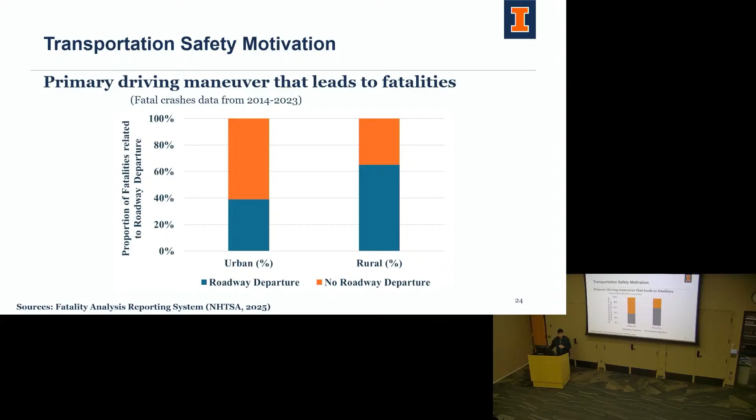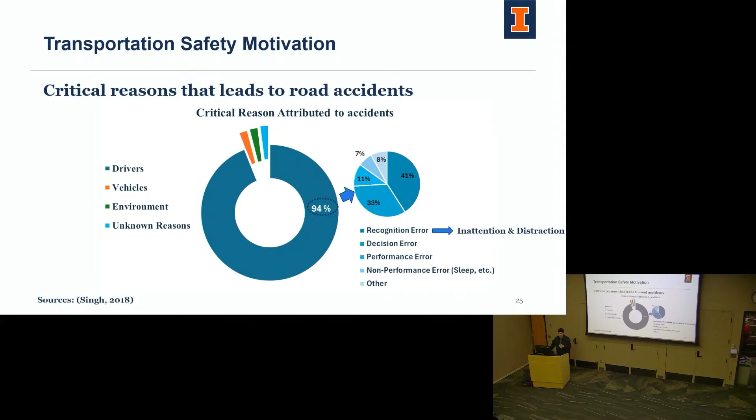The primary driving maneuver that leads to fatalities in the US, nearly 50%, is roadway departure. And the critical area is the rural roads, where more than 60% of roadway departures occur. And the critical reason that leads to road accidents, I think everyone in this room might know it: it is human mistakes. More than 90% of road accidents are caused by human error. These errors include recognition errors, such as inattentive driving and distraction, and decision errors, such as speeding or driving too fast for the conditions.

Recently, in the last decade, we have a promising technology called advanced driver assistance systems. This system can address human limitations and has improved roadway fatalities for the last decade. However, when the road marking is covered with snow or the lane marking is obstructed, these systems are not reliable since they heavily rely on visual sensors. So I'm trying to create an electromagnetic-based communicable roadway that can convey crucial safety information or instructions to the driver, overcoming weather limitations and minimizing driving mistakes caused by human error.

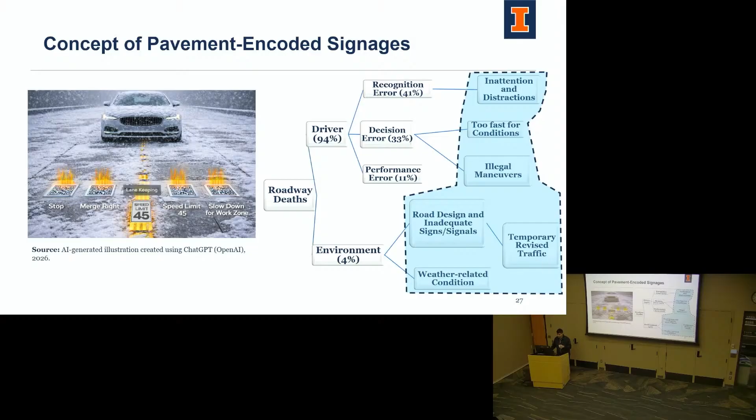So this is the new idea. The initial idea was in 2002 at California, Berkeley. They put permanent magnets on the roadway to assist bus lateral guidance and precision docking at the bus station to reduce the workload of the driver. Later, one of the PhD students in my research group found that we don't necessarily need to embed an actual permanent magnet. We can also disturb the local Earth electromagnetic field by embedding high magnetic permeability material in a pavement layer. He put in materials such as steel fiber, iron filings, and metglas ribbon, and this disturbs the local Earth magnetic field, and the sensor can detect the lateral position from this material.

However, after that, we received feedback asking about temporarily revised traffic areas such as work zones, because we need to change the electromagnetic signature in that area. So right now I'm focused more on temporary deployment. I think the answer is a coating application. I was trying to put magnetizable material and coat it on the roadway.

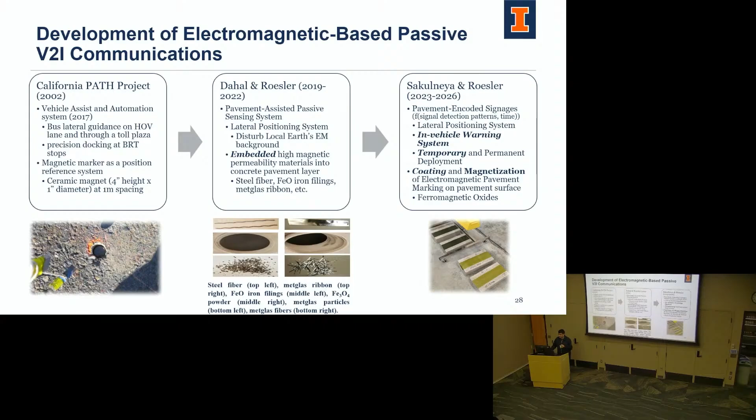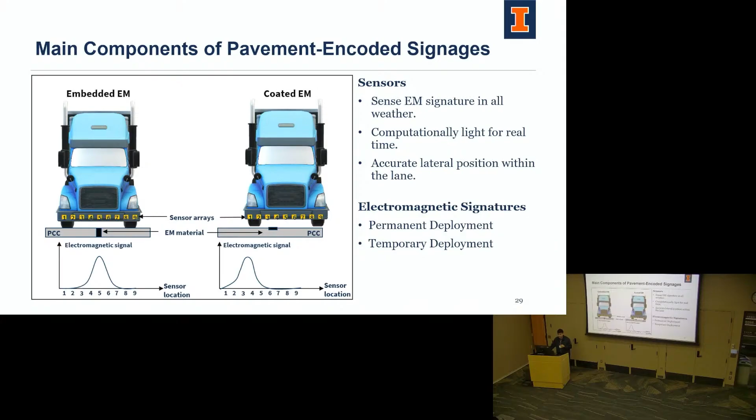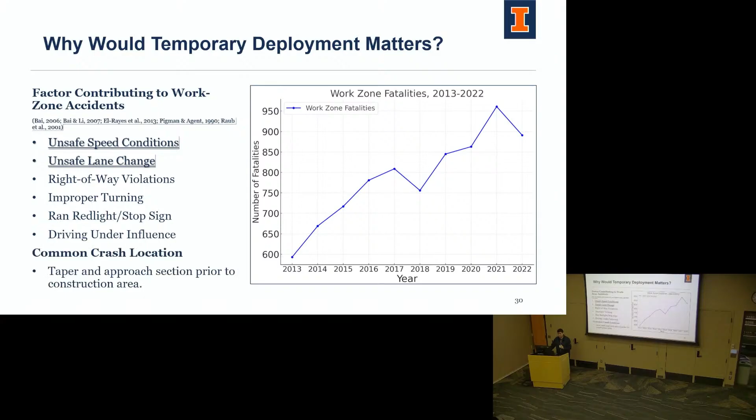So why would temporary deployment matter? According to work zone fatality statistics for the last decade, the fatality trend in this area continues climbing up. The two major factors contributing to these accidents are unsafe speed and unsafe lane changes, which occur mostly in the taper and approach sections prior to the construction area. The main reasons are driver error, distraction, and inattention. Several countermeasures have been implemented in this area, but according to the statistics, the trend never went down for the last decade.

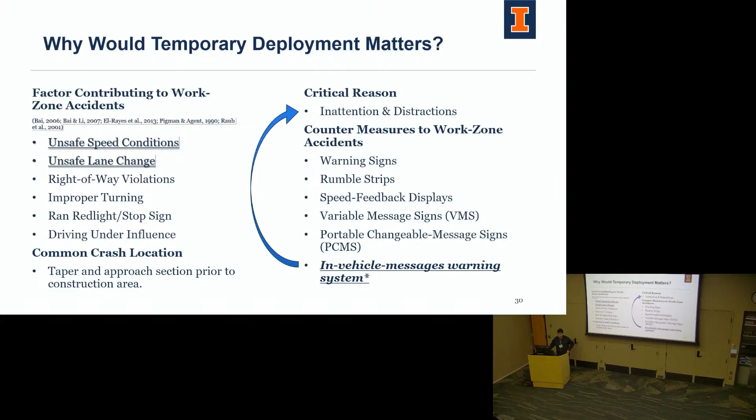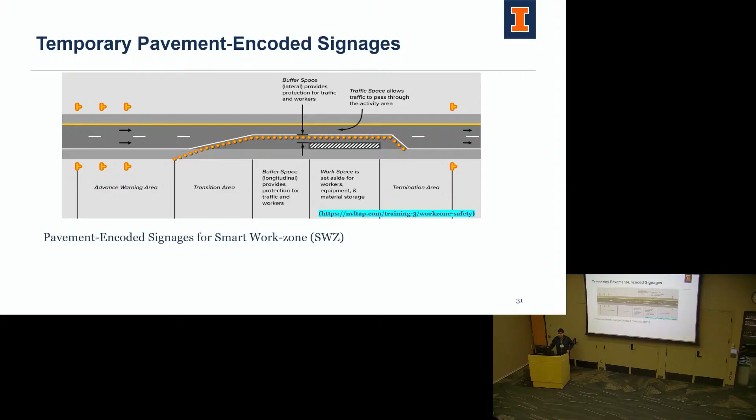So we're trying to build a smart work zone warning system to address driver inattentiveness, unsafe speed conditions and unsafe merging conditions. Imagine if I place the pavement encoded signage for the speed warning for the vehicle approaching the advance warning area, and then I put the pavement encoded signage for the merge left, for the lane merge warning, in several patterns.

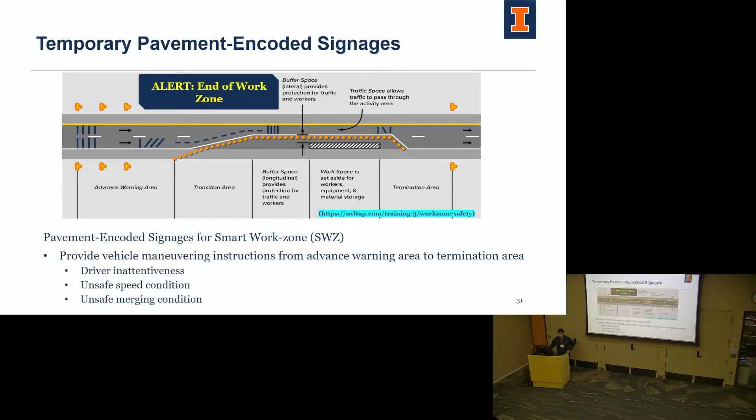And we can also provide the assisted lane shift maneuver during the transition area, and another in-vehicle speed warning before approaching the work space. And the system can also provide the end of work zone warning when the vehicle exits the work zone area. So this is the schematic of how we provide the in-vehicle speed warning.

So if I place the electromagnetic strips in the transverse direction, and the vehicle approaches these strips at a constant spacing, we can predefine the time period for the vehicle to approach this strip. If the vehicle approaches this strip in less time than the predefined time period, it means that the vehicle is overspeeding. So then the system can trigger the overspeed warning alert.

This is another scenario, for the lane merge warning. We can place the electromagnetic strip in a shift pattern. For example, in this case, it shifts from right to left. And as the vehicle approaches this strip, normally the vehicle must have at least 3 sensors located on the bumper. So these sensors can recheck each other, and it can trigger the merge left warning to the vehicle.

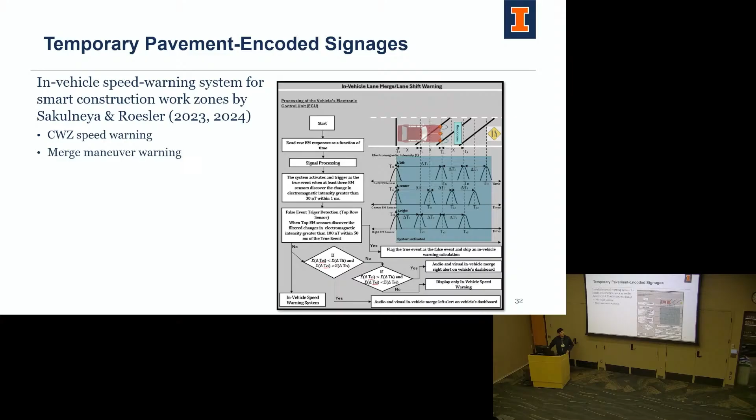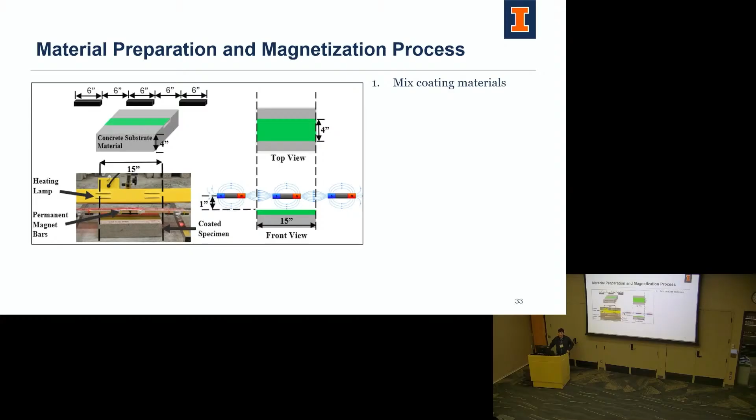So how do I make a coating of electromagnetic signature on the roadway? I use the ferromagnetic oxide material with the conventional epoxy paint marking. And after I apply it on the specimen, I heat the specimen up to a temperature above the Curie temperature of the ferromagnetic oxide material that I use.

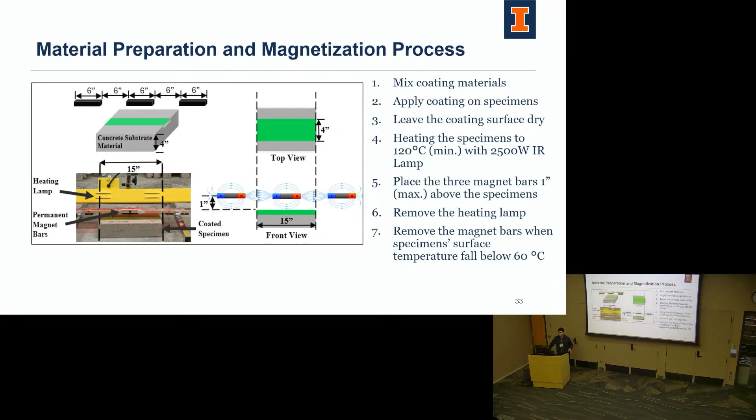So it means I'm magnetizing the roadway by reaching the Curie temperature, and I place the permanent magnet on top to realign the magnetic moment of the marking. And then I reduce the temperature before removing the magnet bar to capture the magnetic moment of this pavement marking.

So I will share some lab work. There are 3 series of lab experiments that I have done over the last 3 years. First, I did a lab experiment to validate the detectability of the electromagnetic signal from the electromagnetic pavement marking.

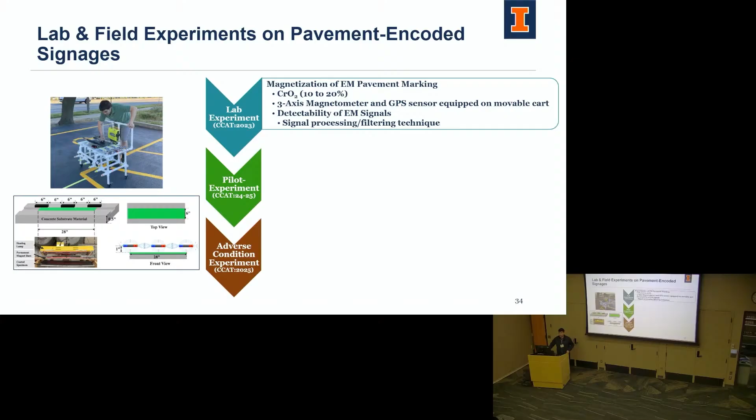And then I developed several pavement encoded signage in different patterns, in the top left figure, for the construction work zone warning. And this time we put the sensor on the actual vehicle and tested at different speeds varying from 15 to 60 miles per hour, different vehicle motions, and different weather conditions, including when the pavement is covered with snow or sleet.

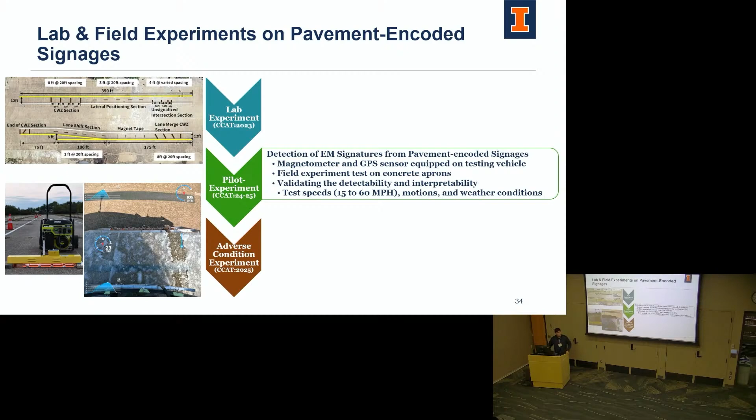And last year we focused on the reliability and accuracy of the system. So I put the electromagnetic strip along the horizontal curve of an actual rural road. The 2 parameters that I focus on in this test are the lateral offset position of the vehicle to the center of the lane and the back-calculated speed of the vehicle.

So I put 12 electromagnetic sensors on the vehicle bumper in the bottom row to detect the electromagnetic signatures, and I put 3 electromagnetic sensors in the top row to capture the electromagnetic interference and use them for rejection of false detection.

So this is the raw data from the experiment. I believe no one could help me identify where the first electromagnetic strip is in this chart, because there is a lot of interference and noise from the environment near the roadway. So the most challenging part of this experiment is the signal filtering and signal processing.

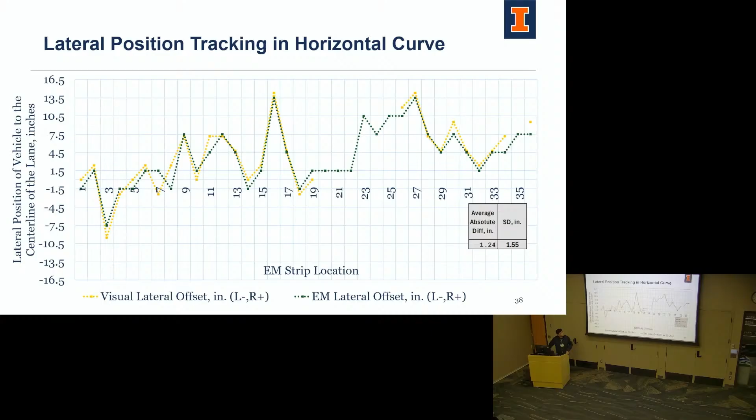And this is the comparison chart between the visual detection and electromagnetic detection from the test that we did on the horizontal curve. We found that the difference between the visual detection and electromagnetic based detection error is around 1 inch.

And this is the validation of the vehicle speed trace, comparing the GPS sensor with the back calculation of the electromagnetic strip. And the speed error is less than 1 mile per hour.

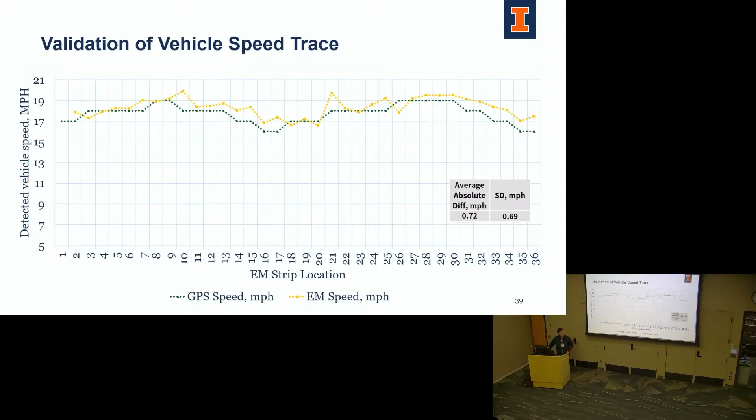And in terms of accuracy, this one is the average absolute lateral offset deviation from the visual sensor compared with the electromagnetic based sensor. So we can achieve about 1 inch lateral error between the two systems, and we can achieve less than 1 mile per hour error compared with the GPS system.

So in summary, the electromagnetic material in pavement with the magnetometer array could enable V2I communication with the focus on peak sensor response detected over the EM strip. And the ferromagnetic oxide, in this case chromium dioxide with 20% of the pavement marking, can be used to create discrete programmable electromagnetic signatures on the pavement surface.

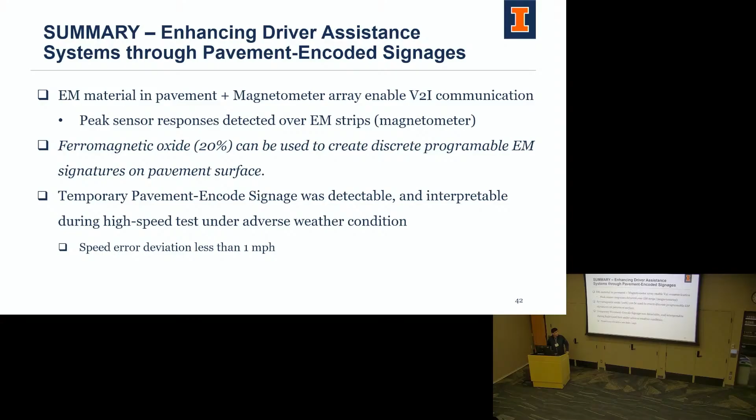And the temporary pavement encoded signage was detectable and interpretable during high-speed tests under adverse weather conditions with low speed error deviation and lateral error deviation.

So magnetic field decays very rapidly with distance. My first question is, what kind of magnetic field are you detecting? And the second question is, you are mounting these sensors on the bumper. Yes. And for realistic applications, sensors need to be integrated into the frame or somewhere.

And there are many parts. The frame itself emits a magnetic signature, and it's unrealistic to degauss all of those frame elements or structural elements. And also, of course, there is interference from other components too, like a motor. How do you account for or separate the signature from the pavement from structural or component magnetic signatures?

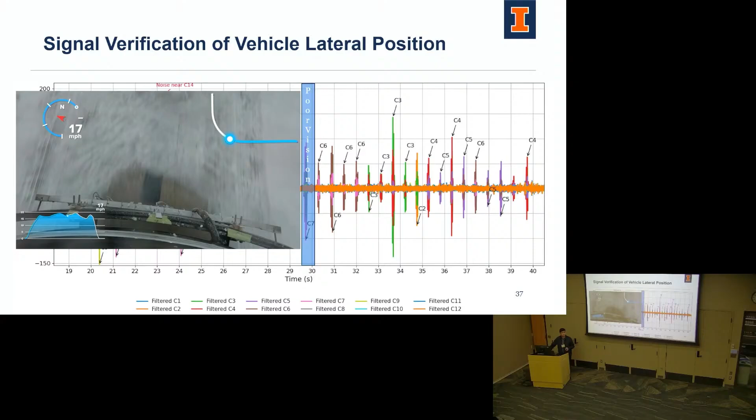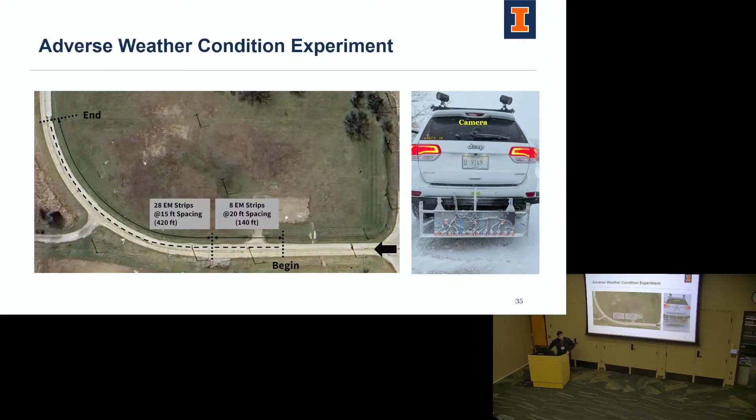So the first question is the Gauss level at the sensor location. Okay. So I put the single axis fluxgate electromagnetic sensor on and capture the signal in the vertical direction. And actually, Volvo car company has done some of these tests before, and they put 5 sensors in their car, and they also validated the detectability of the electromagnetic signal from the permanent magnet.

But for me, the difference between the permanent magnet and my electromagnetic pavement marking is that the electromagnetic signature of my pavement marking is within the nano Tesla unit, around 100 to 1,000 nano Tesla, and we try to capture the change in electromagnetic flux in the vertical direction.

And we can distinguish our electromagnetic pavement marking from the metallic material surrounding the vehicle, because the electromagnetic flux of metallic material is strong. It's more than 10 times stronger than our electromagnetic signal, and the coverage area of electromagnetic flux for metallic material is broader than our electromagnetic signature. So we try to capture the small change in electromagnetic flux from the pavement.

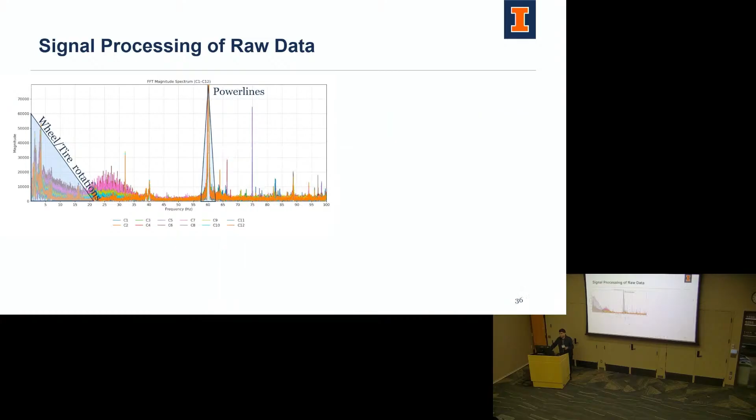And I put 2 rows of sensors; the top sensor also detects the interference. Let me say it this way. We distinguish the electromagnetic signature from the pavement from the other EM sources by assuming that if the bottom sensor detects the electromagnetic response, it does not necessarily capture the electromagnetic signature from the pavement. But if the top row sensor did not detect the electromagnetic signal at the same time as the bottom row that detected the signal, that is a condition when this is a true signal.

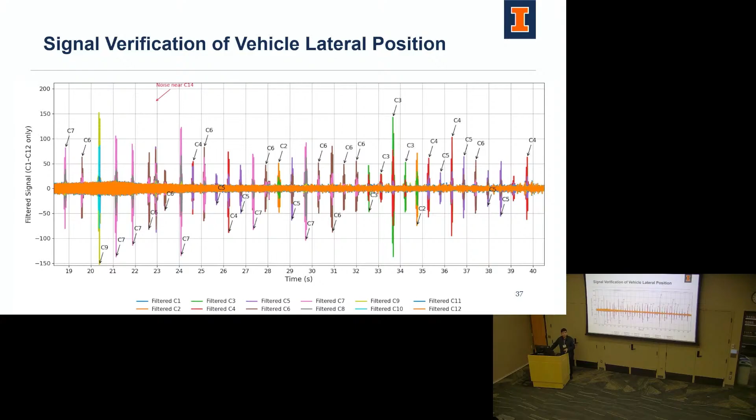But if both rows detect the same signal at the same time, like within 10 milliseconds, we assume that is noise or interference from another source.